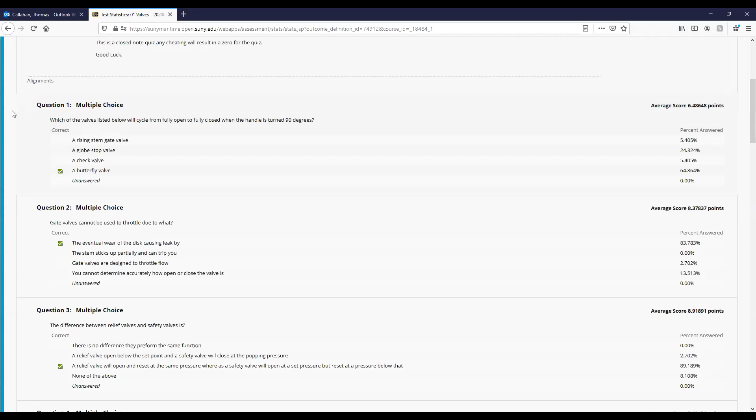So Professor Callahan, what's going on? Earlier you were going on about ABET accredited, and I was wondering, do you know the reason why Marine Ops Engine is not ABET accredited? Because it is not technically an engineering degree. It's not that's really what it is. It's not an engineering degree. You are studying to be a shipboard engineer, but that has nothing to do with ABET.

So ABET is basically an accreditation program where it goes through and certifies that, for example, Binghamton University has a mechanical engineering program that's met their standard. It's a standard nationwide. But Marine Ops is not engineering based.

It's actually, I think it's an art, a Bachelor of Arts or something like that. It's the same thing as business. I don't remember correctly which one it is, but it falls underneath that accreditation.

The school is basically saying this is what these kids have done for learning, and they've met the standards of the school, whereas for engineering, you've met the levels of the accreditation. So technically it is not an engineering-based major. It's a Bachelor of Science, I believe. It's a Bachelor of Science? Yes.

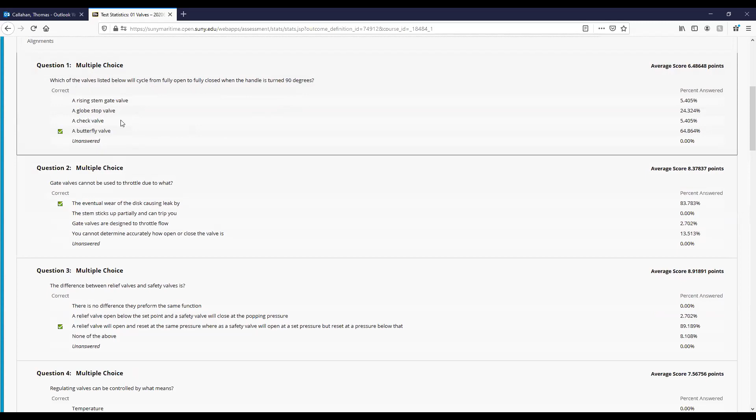And a globe stop valve, I think I made that up. A lot of things you have to look out for is just because it sounds correct doesn't mean that it is. It's a lot of these things that I will just make up on the fly because I think it sounds interesting. Or if it's something along the lines of which we will see in pumps, it may sound correct, but if we didn't go over it in class, then it's not correct in this class.

All right, so remember what we've gone over. A gate valve cannot be used to throttle due to what? And that's the eventual wear of the disc causing leak by.

Now, you cannot determine how accurately a valve is open or closed. That's super incorrect. You can actually determine how open or closed it is at pretty much all levels. As soon as you're turning it and go all the way until it stops on the lefty-loosey or the righty-tighty, the valve will be either fully open or fully closed. And then the distance between where the stem and the actual bonnet, the top of the valve, will determine how much percent it is open.

The difference between a relief valve and a safety valve is a relief valve will open and reset at the same pressure, whereas a safety valve will open at a set pressure but reset at a pressure below that.

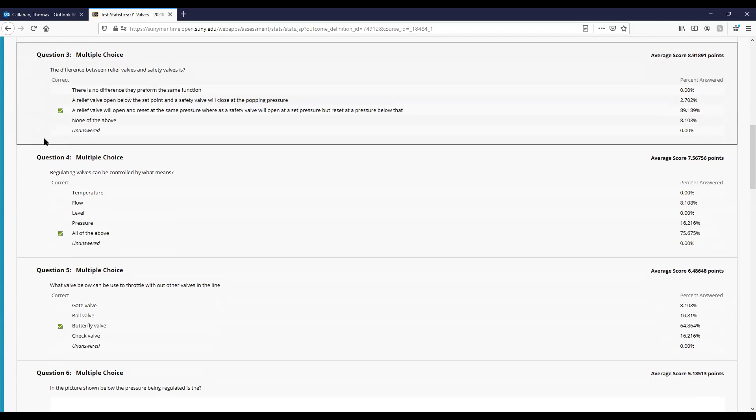So regulating valves can be controlled by what means, and that is everything. Remember, if it can be measured, we can regulate it. We can turn it into a signal, especially nowadays. With digital controls, with computers and everything else along those lines, we can even do that more and more accurately.

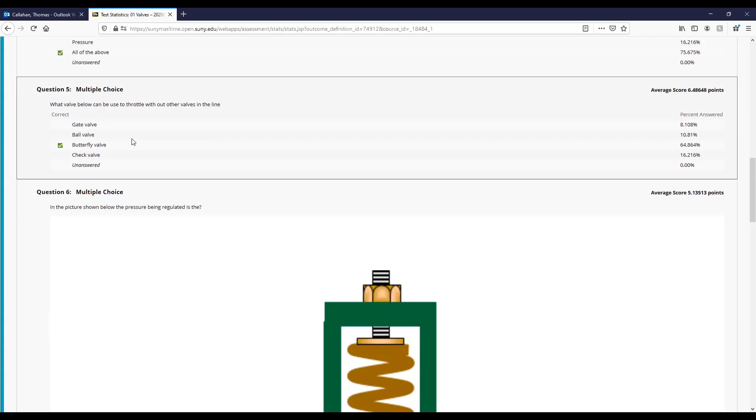What valve can we use to throttle without other valves in line? The only one here that's listed that is a throttle valve is a butterfly valve. If it stated that you had two valves in line and only one of them is used for throttling, which valve would it be? Gate valve. Yep, correct.

In the picture shown below, what is the pressure being regulated? So we have flow coming from left to right from below. We can see that it comes up below this piece of gasket, below this piece of baffle material, and that's going to counteract the spring force. As it pushes up, it's going to close the valve.

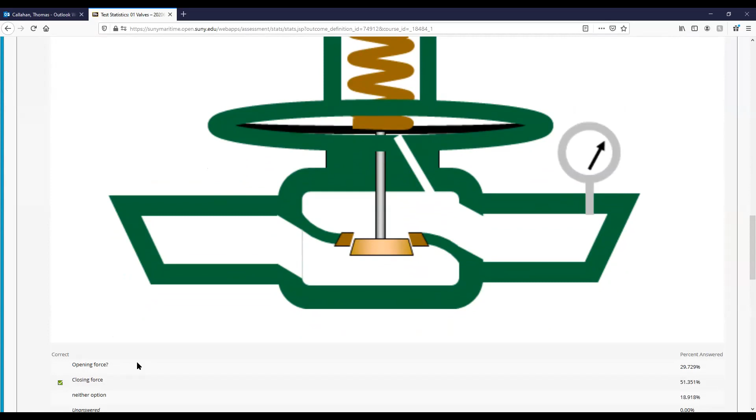In the picture shown below, the valve is maintaining what type of pressure, and that is going to be back pressure. So it is not backflow - we did not go over any type of word like that. It's not downstream pressure; downstream pressure would be over here in relation to the valve. This is upstream, and it's not downstream flow. So the only one that's correct is back pressure, the pressure keeping backwards, because it flows from left to right here.

A bypass valve is used to direct flow around an isolated piece of equipment to allow continual operation. That answer is true. If we didn't have that, we would be shut down by a faulty meter.

A swing check valve allows flow in either direction when mounted vertically. That is false - these can work in a vertical or horizontal orientation.

What check valve, if mounted vertically, would allow flow in both directions? Who remembers that? Could you repeat the question, please? Yep, if a valve was mounted vertically, what check valve would you use? A swing check valve? You would use a swing check.

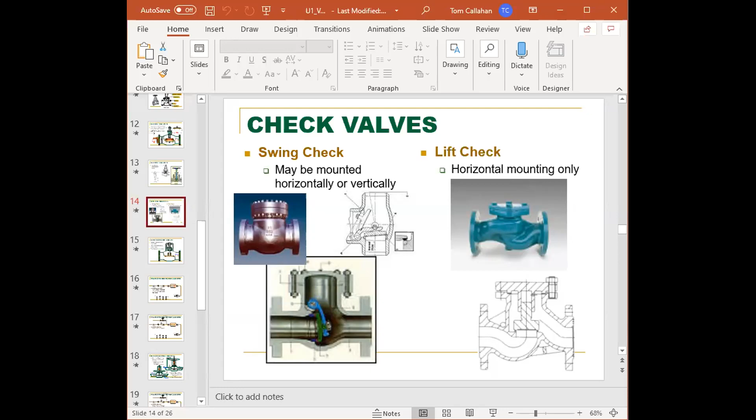So going from there, let's see, we're on question 10. A packing gland's main purpose is to provide an area where packing material can be inserted to create a watertight seal around the stem. So I drew this last class for everybody right here. What we have is in red, our actual gate, the gate portion of the valve, the disc. In black is the bonnet. Right here, where I have a number 1, the arrow pointing to, is our packing gland.

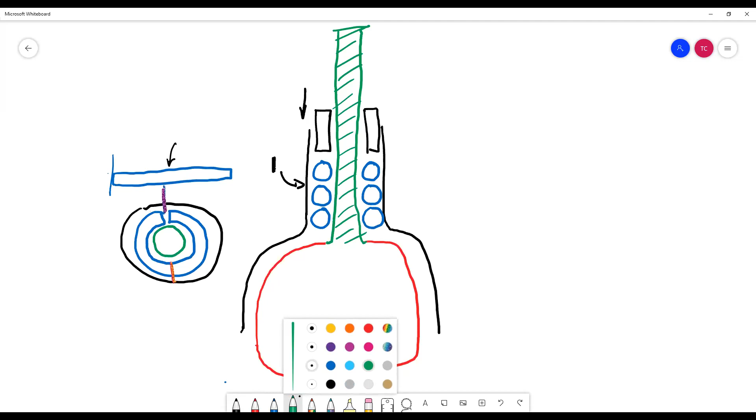It utilizes a string-like material that you cut into pieces. Now the green is the stem, which I have drawn here on a vertical looking downwards. If you were looking downwards that way, that's what this drawing is over here.

So we have our stem in the middle. We do our packing material around in a circle, about 3 layers deep. We alternate where the cut is, from one side to the other, where this glitter is, because I ran out of different colors. So each one is rotated so that way it seals it up.

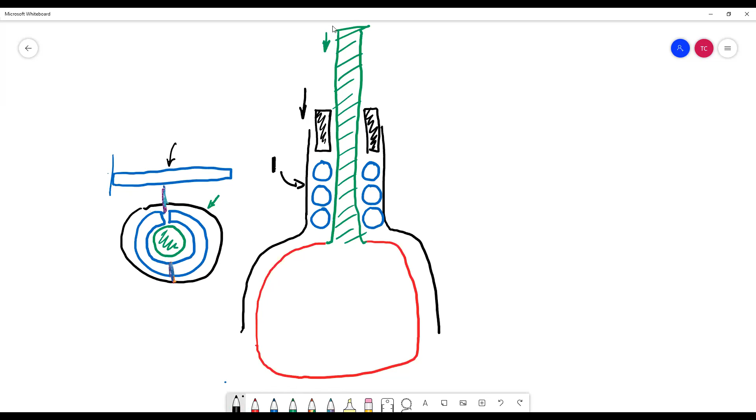Finally, we would have this black material right here. What that will do is push downwards onto the packing material, creating a nice tight seal.

So from there, any questions? We're going to go right into piping. So this one, you guys did way better. Nice job on that, it was a 79, pretty much an 80 average there.

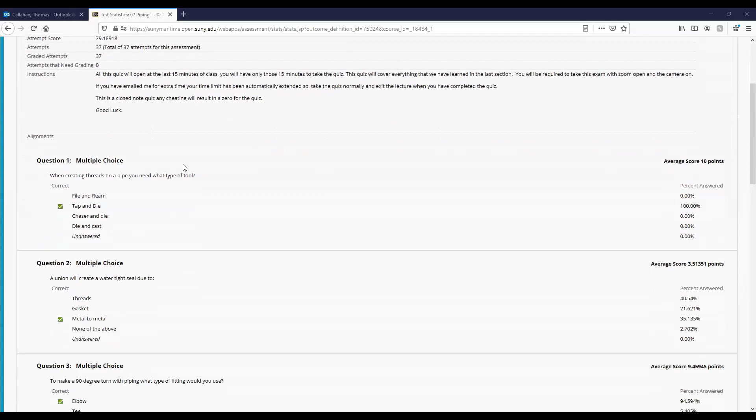When creating threads on a pipe, you need what type of tool? You all got it right. Good job, tap and die.

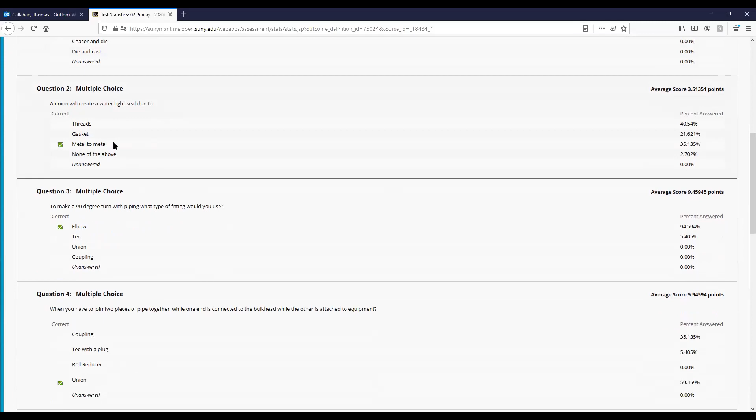A union will create a watertight seal due to what? That is a metal to metal contact. The threads are what create the pressure, what create the force that actually creates that seal. If you're confused on that, look to the piping pictures in the PowerPoint slides, the actual photos that I posted to Blackboard.

To make a 90-degree turn with a piping, what type of fitting would you use? The only fitting that would work here is an elbow. For those who said Tee, how would you keep the flow coming out the third side? Because in a bind, you could use a Tee, but what would you have to use? Plug, you'd have to use a plug. What else could you use?

Caps. How would you use a cap onto another fitting? What would you have to add? External threading. Well, it would have to be external threading, but if they're the same size, how would you do that? If you have a T, right?

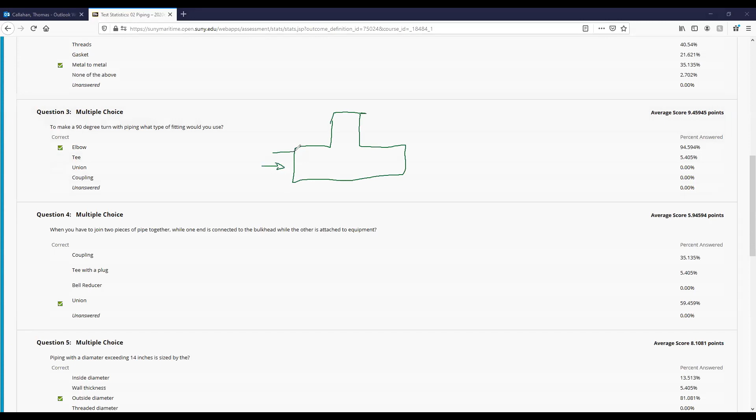And we have flow coming in this direction, right? We have a pipe coming in there, we have a pipe going out there to make a 90-degree turn, right? So we could put a plug here, which was already answered. But if we use the cap, it will be the same size as the fitting, right?

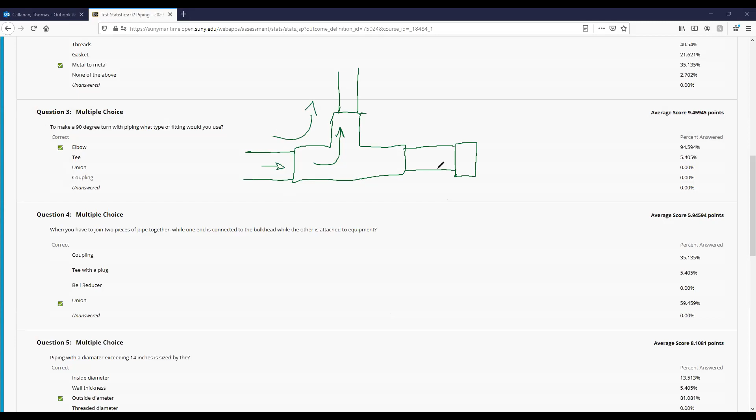So what would we have to do? Would you have to use a tap and die? Or you wouldn't use a coupling, you'd just attach a pipe, you would need more pipe. So if you added a little piece of pipe here, that would stop the flow, right? And we'd get what we want, a 90-degree turn. So in a bind, you could either put a plug in this spot and plug it, or add a small piece of pipe and a cap.

Again, this is just about being creative with what you have to do sometimes on a ship. You may be in an instance where you don't have an elbow, but it's leaking and you got to fix it.

How does a cap differ from the other piece you were describing, a plug? Yeah, how does a cap differ from a plug? All right, let me draw the T again. Here we go, so that's the T.

That's the flow of pipe. Shoot. Where's the pen? There we go, that was super weird.

So we have the pipe going out that way, and we have the pipe going out that way. Now we had the cap, and if we have a plug, a plug is going to be what's going to go into it. It's going to have a smaller diameter.

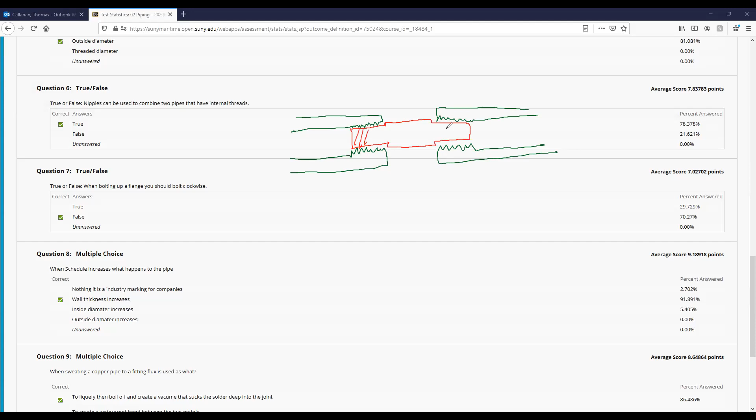There's pipe number one with its internal threads, connected via, this is going to be a cut in half look. The nipple is going to be inside of it where it's going to have external threads that go into the internal threads here. So that is our nipple, in red.

Now, from there, bolting up flanges, you should do it clockwise. That is false. What is the actual pattern we are looking to do? It's like the star pattern. So star pattern, pick a corner, pick a bolt, and go from there and go in a star.

When schedule increases, what happens to the pipe? 91% of you got this correct, nice job. Your wall thickness increases. It's all based on your wall thickness. Your outer diameter is not going to increase, and your inner diameter is going to decrease. So you can get a thicker wall.

When sweating a copper pipe to a fitting, flux is used as what? So flux is going to liquefy and boil off. It's going to create a vacuum inside, and that's going to suck that liquid solder deep into the joint and make a full connection.

And then finally, pipe thread is different from machine thread. That is true. You cannot use a machine thread tap and die set for piping.

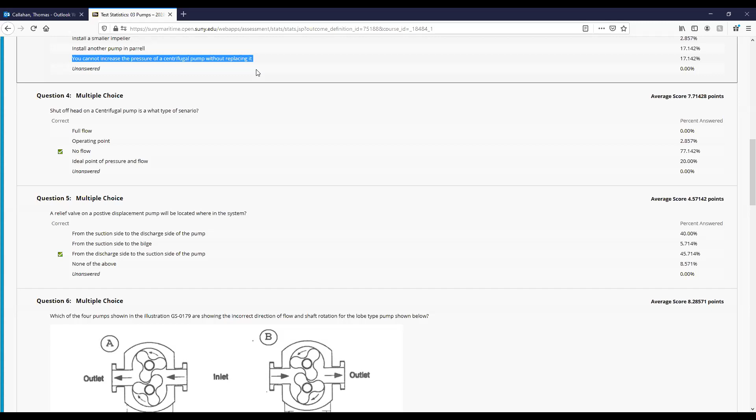To increase the pressure of a centrifugal pump, what can you do? The only thing you can do is increase the speed of the pump. Now, this is technically correct if you need to go outside of the range of the pump, but for all purposes, you increase the speed of the pump. Yes, if you need a crazy amount of pressure, if you want to go from 60 to 300 PSI, you definitely need to change out the pump. But if you're just going to increase it a little bit, you just increase your speed.

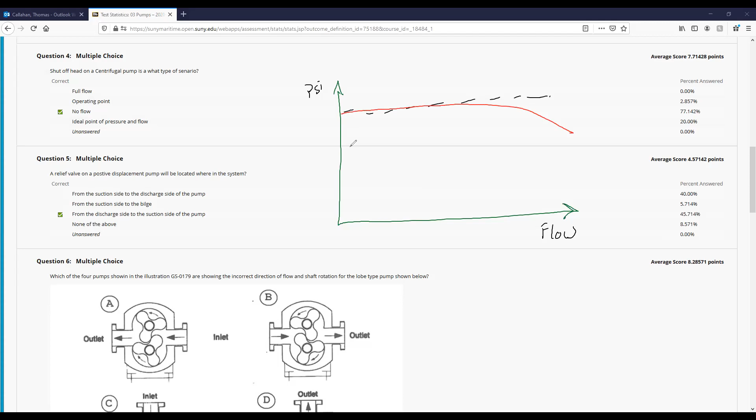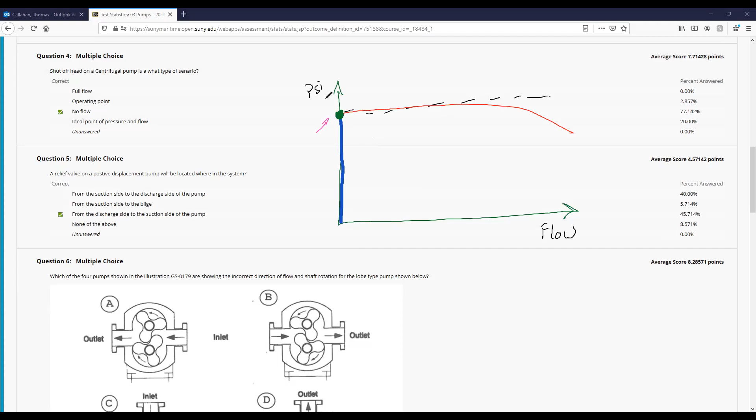So if you have shut off head, what does that look like on our chart? We have our centrifugal pump chart, looks like this. There is PSI, there is flow. We have our pump line goes like that. And finally, we have a green dot right there. So right at that point is a no flow scenario. We have shut off head, that's where that point is. We know that's shut off head because we can follow our blue line, which is a closed valve, allowing no flow through. So that is shut off head right there.

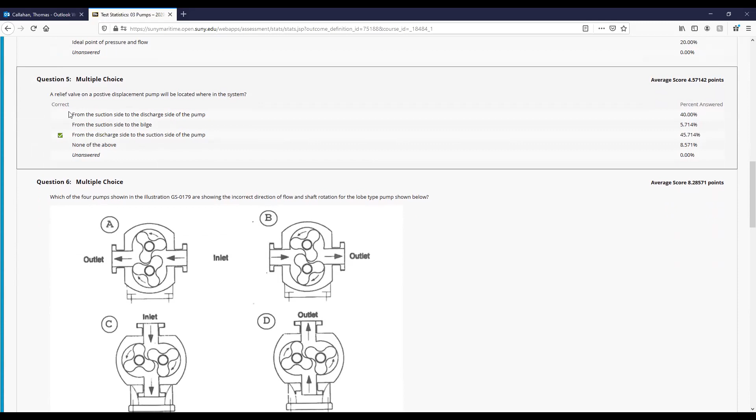So a relief valve on a positive displacement pump will be located where in the system? That's from the discharge side. It's sensing from the discharge side and going to the suction side of the pump. It is not going to be coming from the suction side. We are not going to be relieving the suction side. So we're going from the discharge to the suction.

Going from here, which of the 4 pumps in illustration GS0179 shows the incorrect way of our lobe pumps? That is letter B. This is a direct copy paste from the Coast Guard book. Same question - I've actually had this question on my thirds exam.

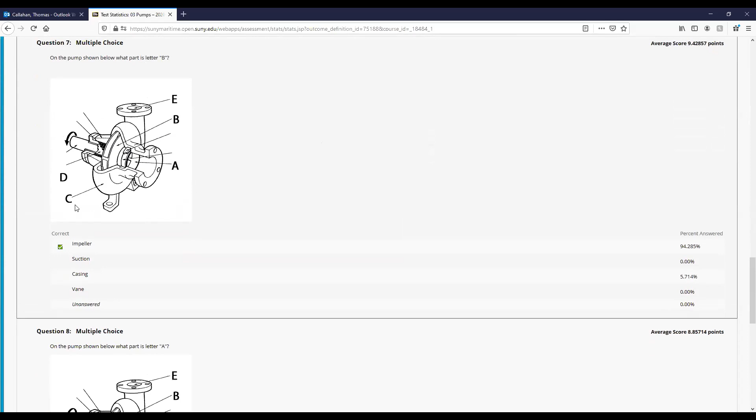So on the pump shown below, what is letter B representing? If we look at letter B, we can see through this entire piece, this is a centrifugal pump, just a side view of an actual centrifugal pump. And it's pointing at this entire face here, this piece right here - that is the impeller, which 94% of you got correct. Now letter A is representing this entire area, both the center, which is our suction or our eye. So 88% of you got that correct.

What is C and D representing? So what is C representing? The casing, yes. What about D? Got a chat response. It is not the powered discharge shaft - it is going to be the shaft. So what is E then? E would be the discharge. So D is our shaft, C is our casing, A is our suction, B is our impeller, and E is our discharge.

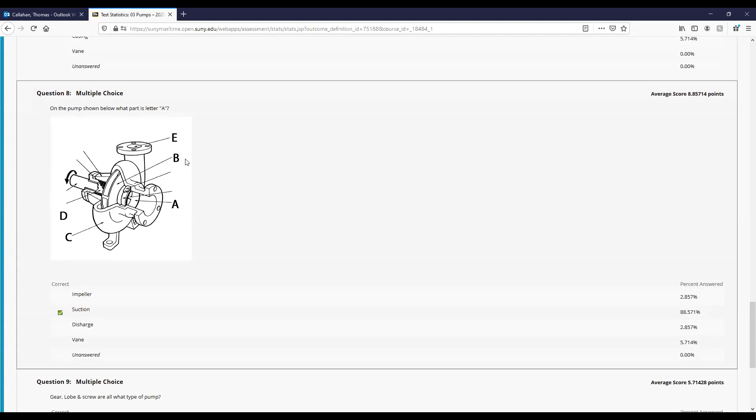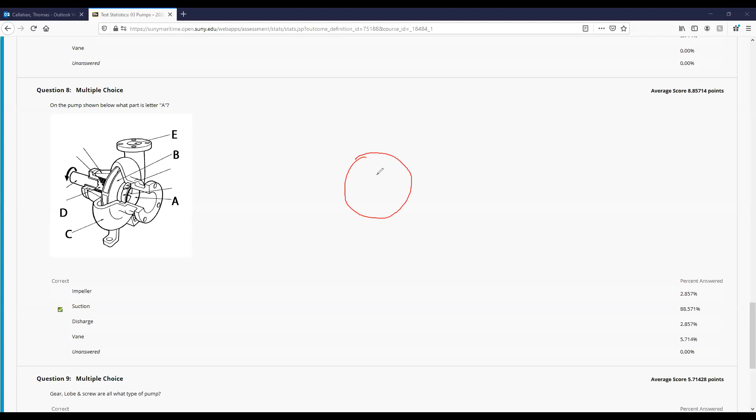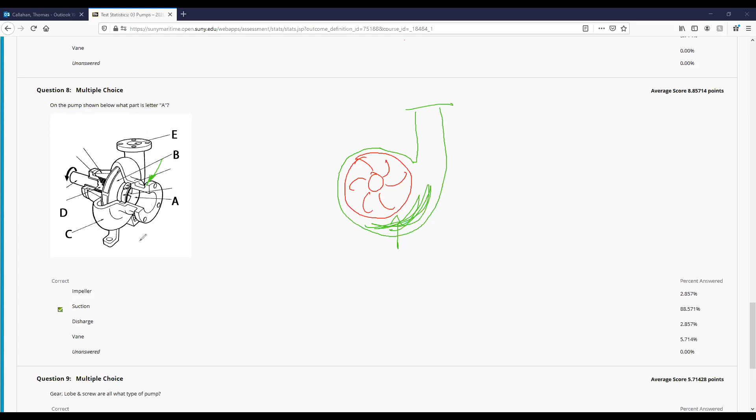In that case, isn't the casing called the volute? So yeah, let's go into annotate, we'll go red. Remember, we have our impeller right here - that's what's drawn in red here. And then I'm going to go green for our casing. So the volute is going to be that whole area where it actually discharges - this is our volute right here, like this area. So the outside portion is the casing, but the volute is what actually makes up that area where it gains that kinetic energy and goes upwards. So if C was pointing on the direct opposite side, like all the way over here, think 3D, on the opposite side of that suction, then yes, that would be the volute/casing area.

Good catch. So gear, lobe, and screw are all what type of pump? That is a positive displacement. Kinetic and centrifugal - centrifugal is a part of the kinetic area and kinetic is not part of a positive displacement. And reciprocating is a piston-driven pump.

True or false: positive displacement pumps will send a fixed volume with each stroke or rotation. That is true. Positive displacement does not care - it's always going to do a fixed volume. Any questions on that before we continue on?

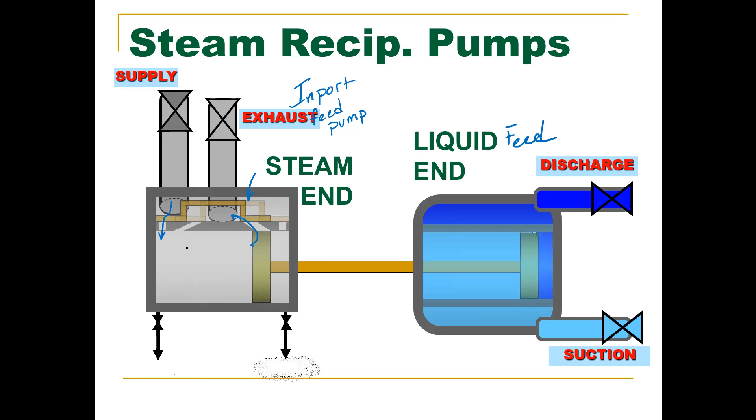You can see how the steam valve works - steam comes up across over here, and it will fill this side in. So all of the exhaust here is going to come up and through that exhaust line and come out that direction, and vice versa. So if it goes this way, we have steam supply going in there, and all of the exhaust here is going to come up and go out our exhaust that way. All due to that slide valve right here.

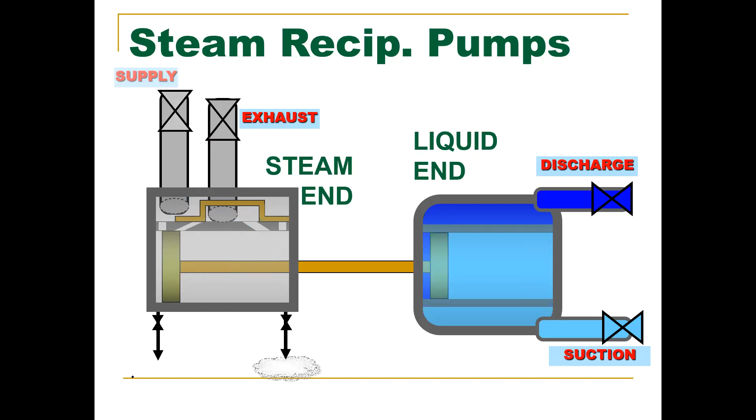All right, and it goes back and forth, and it pumps some water. Just a positive displacement, steam-based feed pump.

All right, so this is our turbine feed pumps, our main feed pumps, also starboard side of the engine room. Who knows where? Who can remember?

So I just drew the shaft, that's the ladder well going down, so that goes out to the shaft. That's aft. We have a door right here that goes into lower engine room, right? So this is forward.

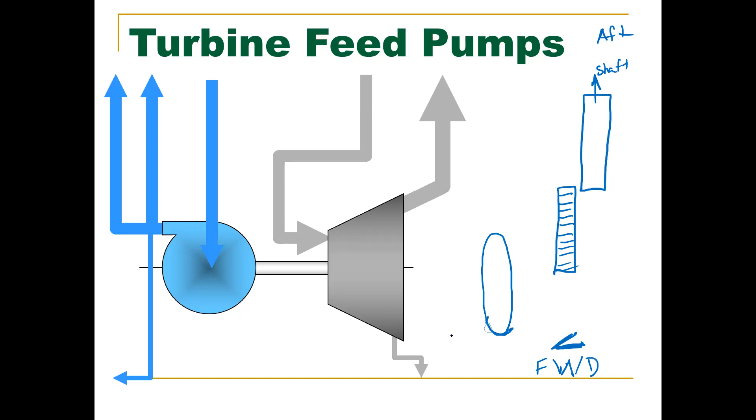All right, we have our auxiliary condensers right here and right here. We have our reefer system over here. Testing your knowledge on your ship training that you guys did - I know you didn't do lower engine room yet, so that's our reefer system.

All right, we have our inport feed pump. And right here, this box and this box, those are our feed pumps. Those are our main feed pumps.

So we have our big condenser over here. So you come down the stairs, you're on the starboard side. You're walking past these two feed pumps as you go down to Shaft Alley that way. So that's the equipment we're talking about, our two main feed pumps.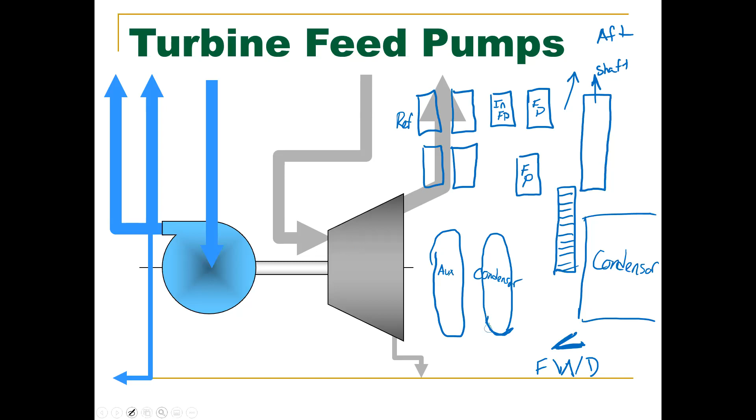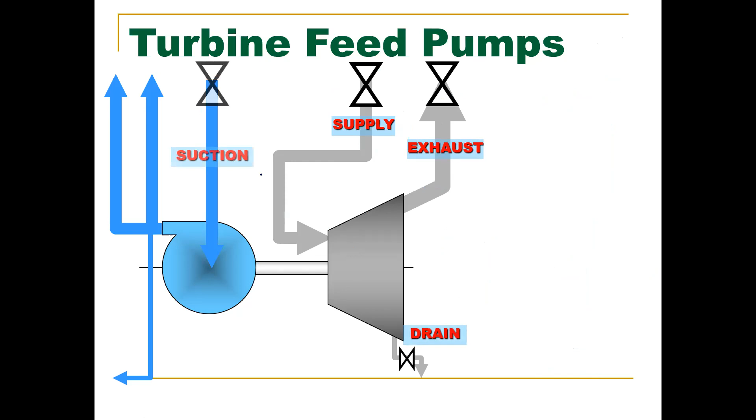We'll see a picture of it in a second. So, quick drawing that we have here, we have our exhaust from our turbine. That's an exhaust for steam. We have our supply for steam. We have our suction, this is coming from our DA heater.

And now it discharges. Let's go red. Now, we will talk in depth about this when we hit steam, but know this for now. We have two discharges: main and auxiliary.

Now, both go to the boiler. They both lead directly to the boiler. Well, does anybody see any major difference here between the two? They're both leaving the same discharge side of the pump, right? They're just getting split off from each other. So is there any difference?

This is our main and auxiliary feed water. You can have one closed for maintenance. All right, so that's the only thing that we can really see, right? They're the exact same fluid, correct?

So this is the big difference between the two. The main one has a regulating valve on it, so it's automation. The auxiliary side is there for backup. In certain situations, you may have to run a little bit of auxiliary feed going into the boiler. That's some higher level stuff we don't have to talk about, but it basically can add a little bit of extra feed water in situations that you, as the engineer, may need.

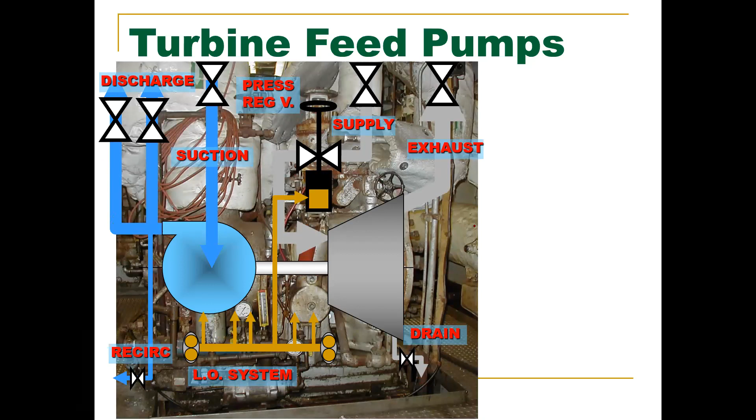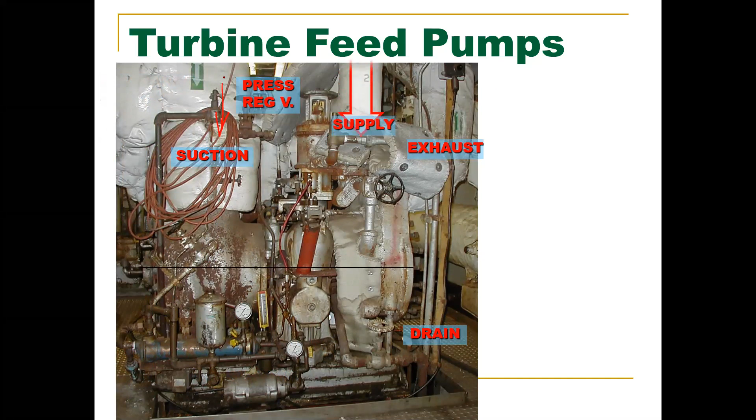So going from there, that is our main feed pump. Does everybody starting to see and recognize this giant piece of equipment in that lower engine room? All right, so there's our exhaust, there's our supply steam, here's our suction coming in again. This is looking like you're coming from forward, you're looking aft.

You have your main feed line and you have your auxiliary feed line. Now, here is a new word right here: trip. OS trip. Does anybody have an idea of what OS trip means? Or just what OS means? Does purple look better? I don't think so. There we go. What does the word O/S mean?

All right, so over speed. That's what everybody will call it, as an OS. If you have to write it, a lot of people will just say overspeed trip. O/S means the same thing as overspeed.

Now, the word trip, does anybody have any idea what this may mean? It gets set off for a certain condition, like maybe pressure or temperature. So both you and Pulley are right together. Pulley said in the chat that it's going to be operational shutoff, like a cutoff, and you were saying it's going to be at a set pressure. So basically what's happening here is trip is like a hard reset.

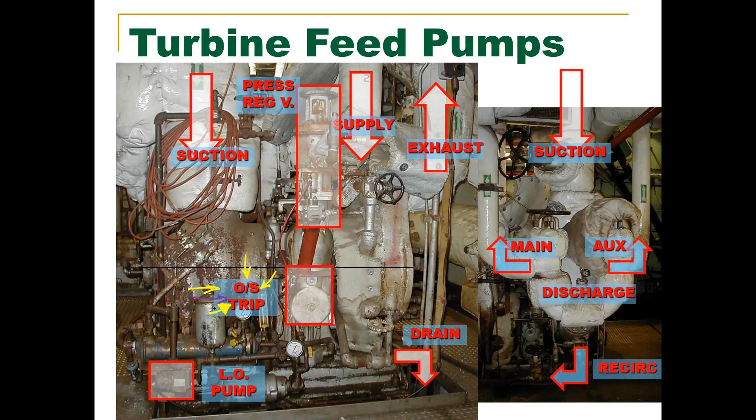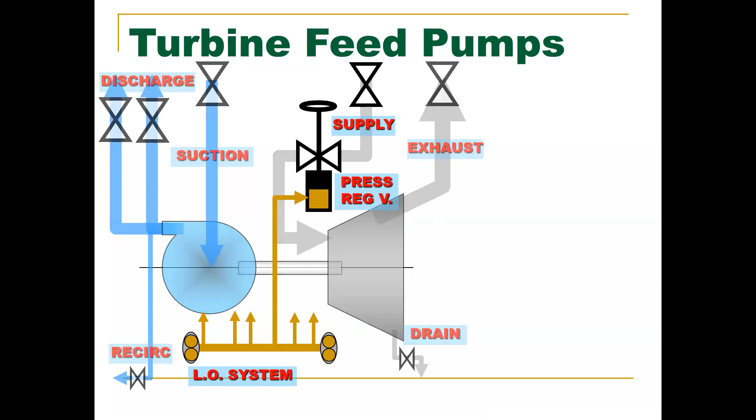Make sense? Good. So we're going back into the system. We have to look at how this controls. We're talking about regulating valves again. So here we are. We have something called a pilot valve.

This brown fluid right here is coming out of a lube oil supply, so that's coming out of a lube oil pump. I'm going to draw it in right there. We have our lube oil return, that's going back into a sump, basically a tank of lube oil, low pressure. And we have an operating cylinder with a pressure regulating valve for our steam supply.

Now we have our feed water, our feed pump pressure, discharge pressure. This is what we are monitoring, this is our input. We are going to be inputting feed pump discharge pressure, but what we are going to be regulating is the steam supply going in, which in turn is going to change the feed pump pressure.

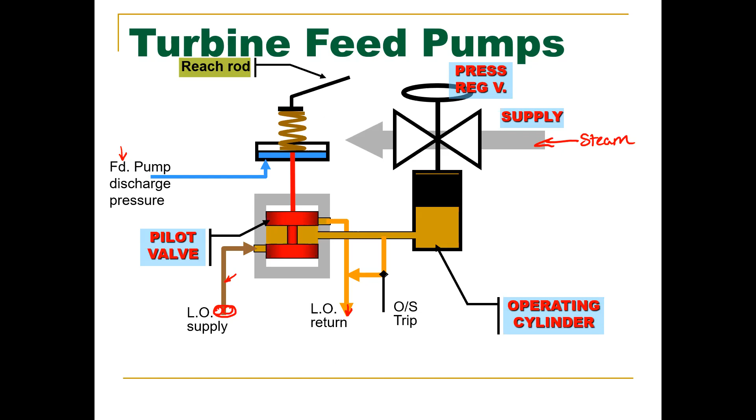Now if our pressure increases, the feed pump pressure increases, what happens? Just like a regulating valve, what's happening in that spot? There's an increase in flow, but what's going to be happening? Remember, just think like a regulating valve. We have our spring in brown here. What's going to be happening there? The spring's going to be pushed upwards.

So if we can overcome that spring force, which is what happens, we push upwards. Notice our pilot valve between those two positions. Here we are, and as it increases, we move that pilot valve upwards. Notice this area right here, this operating cylinder, it's going to flow from high to low pressure. So it's flowing this way, this way, this way. It goes into the pilot valve here. It can't go in that direction, so it only can flow here and go down into low pressure. It goes to our lube oil sump.

Well, this is a piston right here, so that's going to go downwards. And if that's directly connected to a valve, what happens to the valve? It shuts, it's going to start closing the valve. So what happens to our steam supply? It's restricted, so we're not going to have as much, right? So that's how we regulate our steam supply with feed pump discharge pressure. Pretty cool, right?

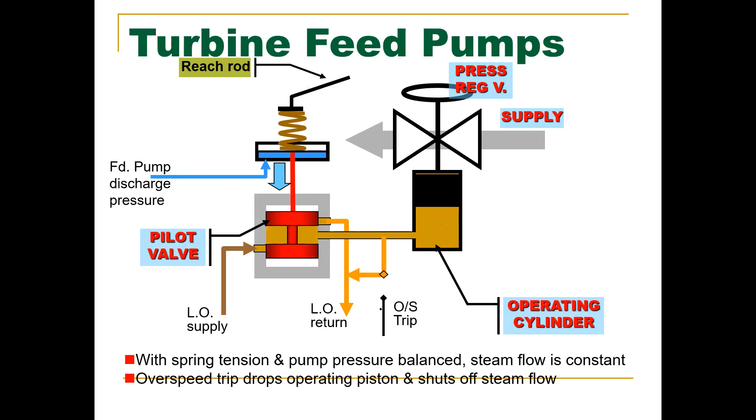So, any more questions?

All right, so let's look at a generic fuel oil transfer, but let's look at what we have in front of us. Taking a look at what we have here. Hold on, let me... there we go, that was super weird.

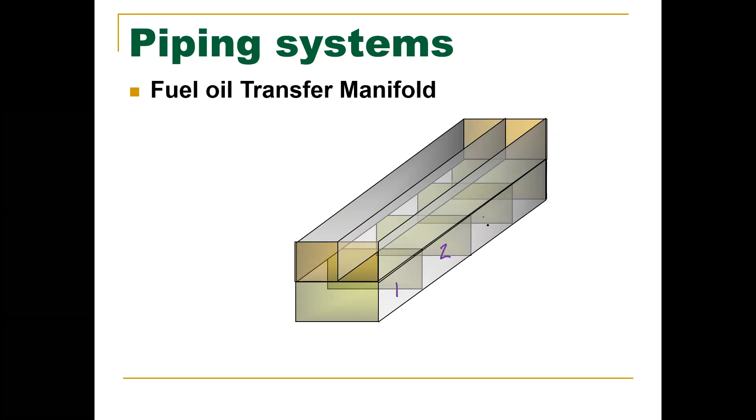Now, each one of those horizontal sections have a pair of valves that go into it on top. Those are the valves that will lead to the piping that will actually go off to tank 1, 2, 3, and 4.

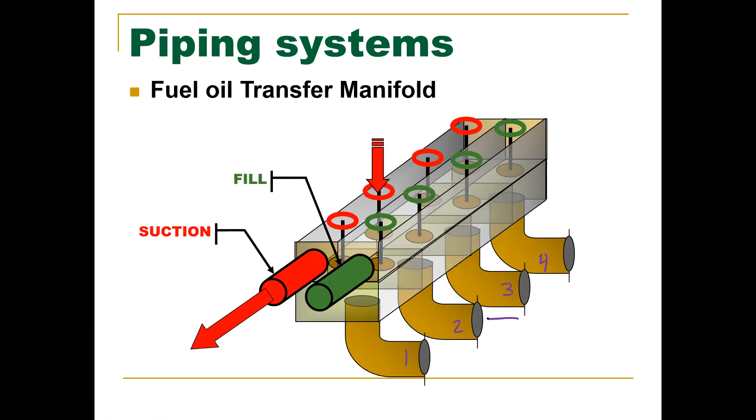Lastly, what we have is a suction pipe and a fill valve, a fill pipe. So what happens is if we want to take suction from tank number 2, so we're pulling in a flow, it fills this whole lower cavity, this whole lower area, and it will come up. Keep in mind there's a plate separating these 2 sides, and it will come up and fill this whole left side here and go out through the suction.

Now, if we want to fill tank number 4, we're going right back around in there. We have a pump that wants to just flip back around. So everything that comes out of 2 is going to fill that lower section. It's going to fill that whole entire left-hand side over here, and it's going to go out that suction pipe, go through a pump, come back into the fill. It's not going to go into 1 because 1's valve is closed. It's not going to go into 2 because there's a wall right here that separates the 2 sides. It's not going to go into 3 again because that valve is closed, and it's going to go only into 4 because that valve is open. All right, so that's how a fuel oil transfer manifold works.

All right, does this make sense to everybody? Yes. Okay.

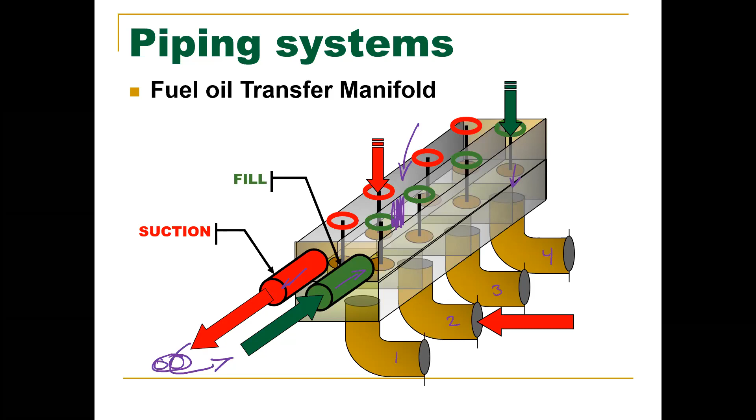Next up, we have a bilge, ballast, and fire main. We have a new word here, sea chest. Does anybody know what that means?

Is that where any like... got two people. It's just where like all the gunk that you get, pretty much like sand, rocks, shells, whatever, you just put it all in the sea chest. Nope, you reroute it there, that's not the spot where we do all of that. Who else has an answer? Was the sea chest where you put seawater for firefighting purposes?

This is not the area where you put anything, so this isn't like a storage tank. What it is, is a literal box that comes out from the deck. So this is you, the engineer, standing on deck - it could be down at tank top, it could be in the bilge. And what it is, is an area where you have seawater below, all below on the bottom of the ship. It fills that cavity in there, and this is where you would actually pull seawater into the ship. So it would go through its strainers, and then it would go out to a valve and then off to whatever system you have in place for it. So it's the area of the ship - this is the sea chest down here. That is the area where you can actually access and pull in salt water, whether to your coolant systems or to make freshwater generation and all of that kind of stuff.

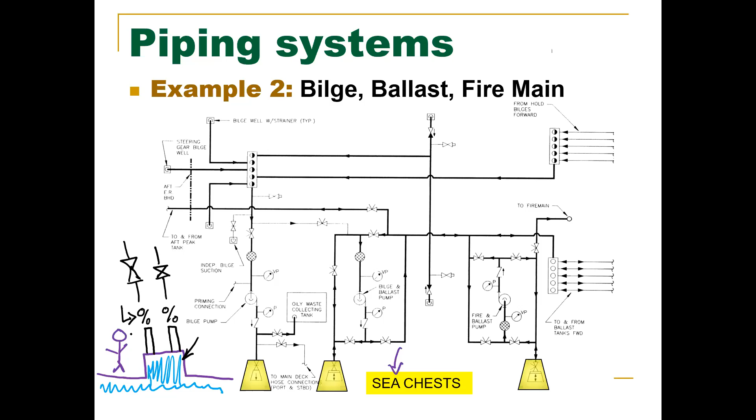And for the person who asked about sand and everything like that, that may be collected. If you are really close to the bottom, yes, you could collect sand and stuff, and then you could have some serious problems with your strainers. So you could have something like that. Now, that's your sea chest.

All right, if we look at our bilge manifold and our ballast, notice we have two different circles there. We have a half moon and a full moon. So looking at it, this is our bilge manifold. If we open a bilge manifold, it utilizes the valve that acts like a check valve.

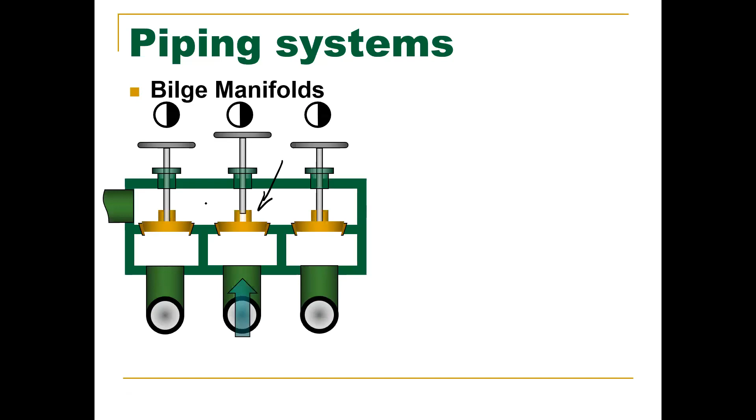You can open it, but until you have a low pressure above it, created by a positive displacement pump, would you actually be able to create a suction and open up said valve? So this would not work in a centrifugal pump application. You would need this in a positive displacement pump to pull from a bilge well.

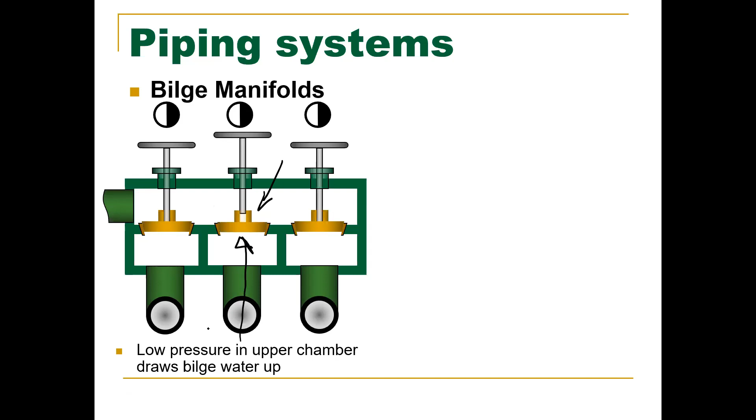But with a ballast manifold, you want full control where this is going to go. You may be going from one ballast tank to another. So you would want to have the ability to suck and put that water somewhere else. It may go to another ballast manifold, where you'd be reballasting.

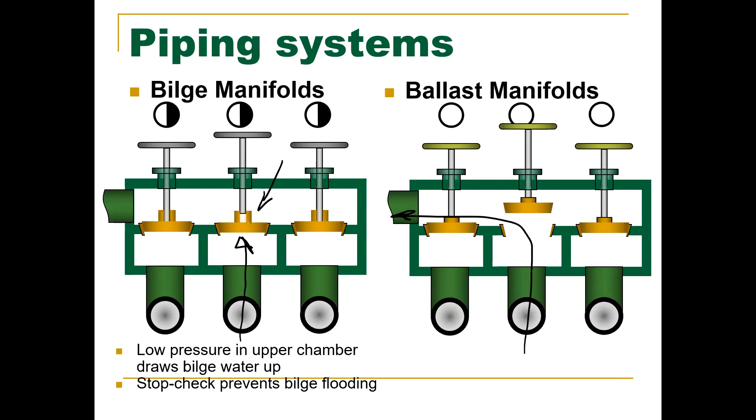So going from there, you can see that the rest of this PowerPoint slide is basically different examples of how you would be operating this system based on a line diagram, how you would go from one place to another. So that's our bilge. This would be our ballast.

So if we wanted to send ballast overboard, because it's just salt water, and those are just saltwater tanks, we legally can put ballast overboard with no repercussions. Or in this example, we can also send it to another ballast manifold and send it from one ballast tank to another. And then finally, we have our fire main, so how to charge our fire main system, and how we can go forward and aft peaks and discharge that overboard as well.

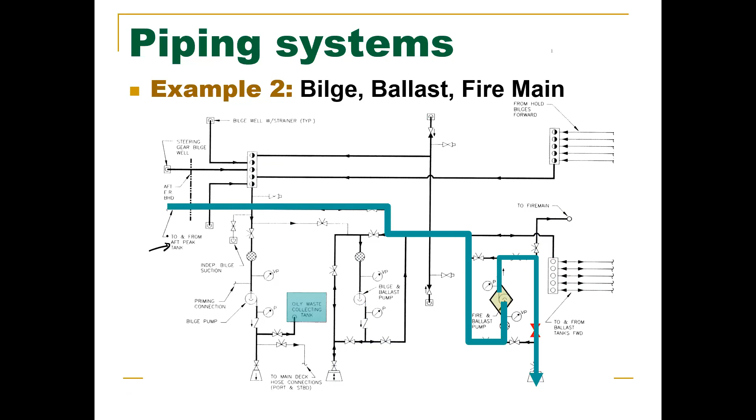Any questions there?

Are we gonna get some practice with this, or should we just study what we went over today? Like, I know we should study anyway, but are we gonna get any more practice? What do you mean practice? Like visuals or scenarios where we have to find out the best piping. I don't know, anything like that. So I would just really look at certain pieces of piping.

Look at that fuel manifold and challenge yourselves as far as studying. Challenge yourself to go from one tank to another, how would you do it? Just don't follow exactly what's there, but looking at your flow arrows that you have on the piping, can you go one direction or another? See if you can. Don't just follow what is exactly there. You can always create your own practice scenarios.